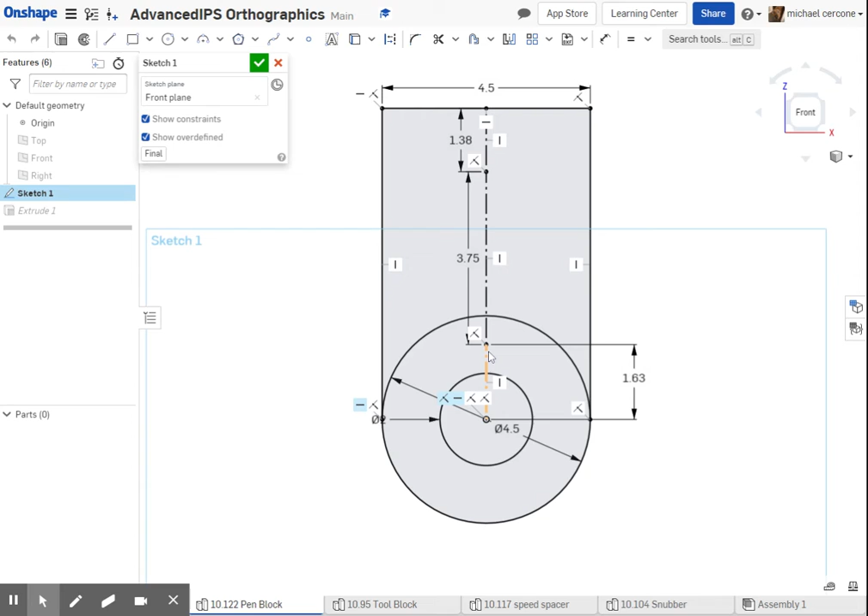My constraints listed, so I started at the origin. I drew these two holes that are concentric with one another. I had to figure out how far up to the top. So going to that drawing, you're provided with, from the center up to the center of your countersinks is going to be 1.625, and then it's 3.75 up to the next hole, and then the next hole is 1.375.

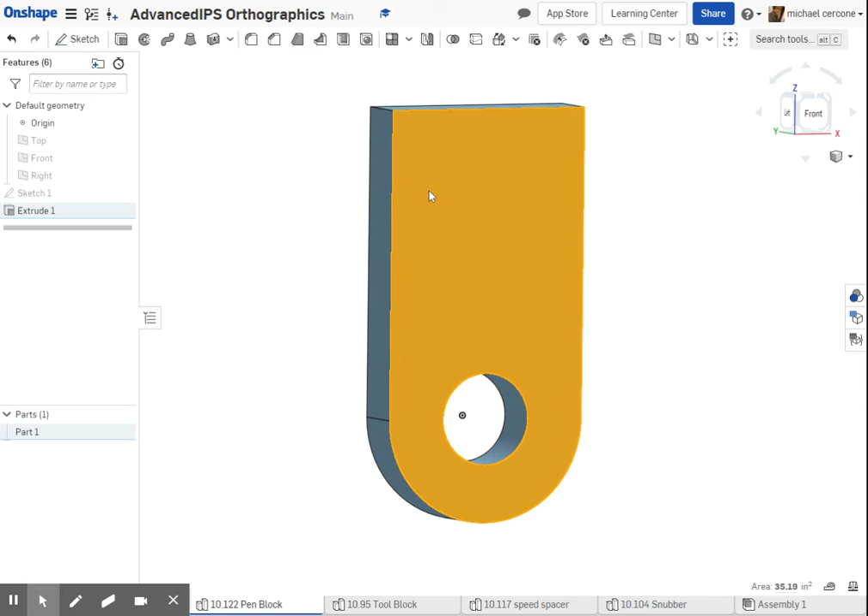So I just drew a bunch of center lines and dimensioned them. Then I took this and I extruded it at the thickness of 1.25. I'm going to add my counterbores next. Counterbores sit right across the top here. You need a sketch with them in place to put in the counterbores. I'm only going to design one, and then I'm going to mirror it to the other side.

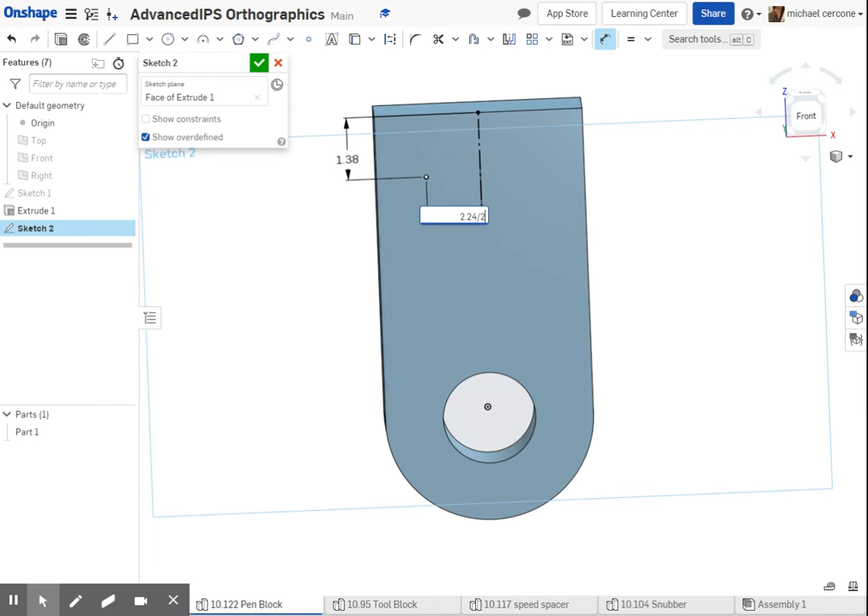So the sketch is on this face here, and all I need to find it is a point. So I'm placing my point and then dimensioning the point. So the counterbore is located down 1.375. And then located from left to right, it looks like it is centered, and they are located 2.24 away from each other. So I'll just draw a center line and dimension this at half of 2.24. So 2.24 divided by 2. Figure out where that point is.

I'll exit my sketch. The hole tool is located right up over here. When you select the hole tool, you're going to be given the option of a simple hole, just a standard drill through, counterbore, or countersink. I know that this one's a counterbore. I saw that symbol that told me it was a counterbore. You could put in custom, or you could choose ANSI and then find the exact one. I am not going to put this on ANSI. I'll leave it on custom.

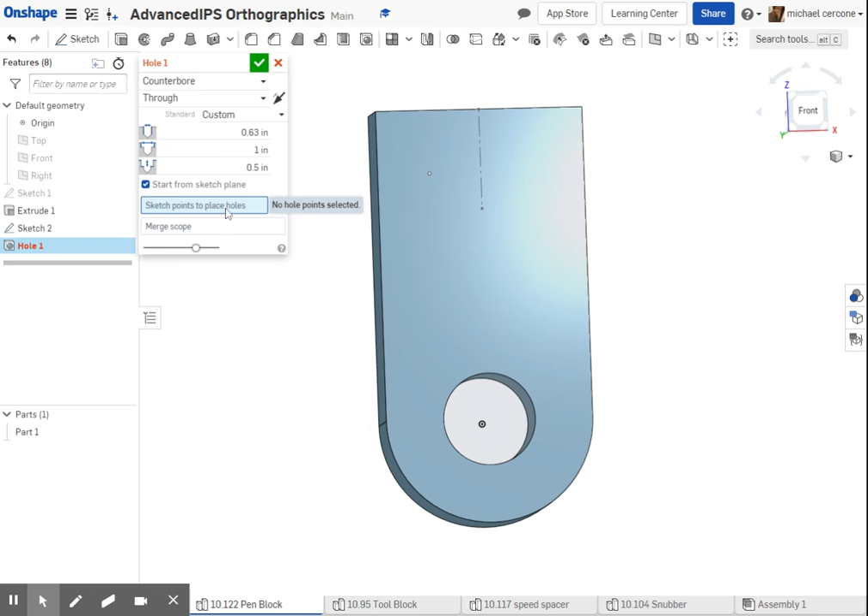So right here is the drill through. So I'm going to type in the size of the drill through. This is the smaller diameter, so the 0.625. Then I have my larger diameter at 1. And then I have the depth of the cut at 0.5. Sketch points to place holes. So I'm going to click here and click on this point. And there's my counterbore. I also have a countersink that's located on the bottom. I'm going to draw that one next.

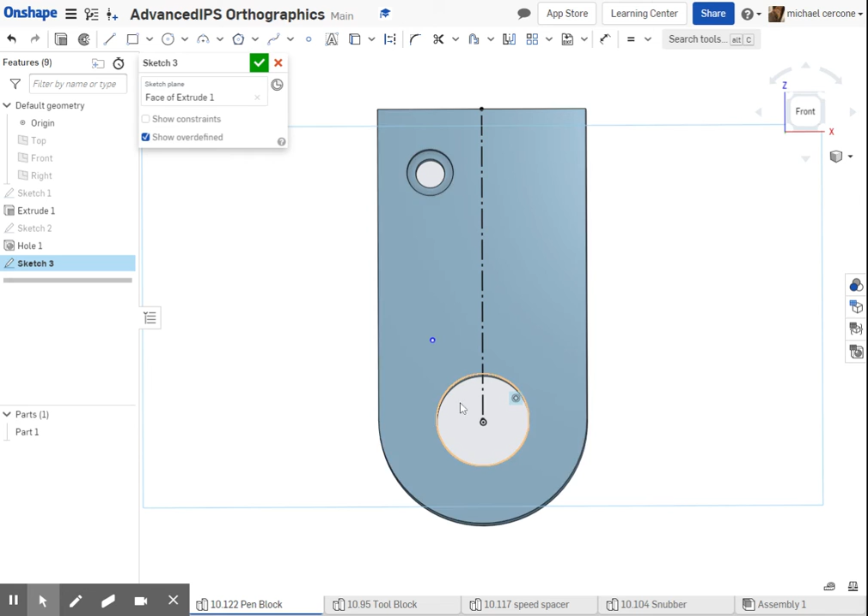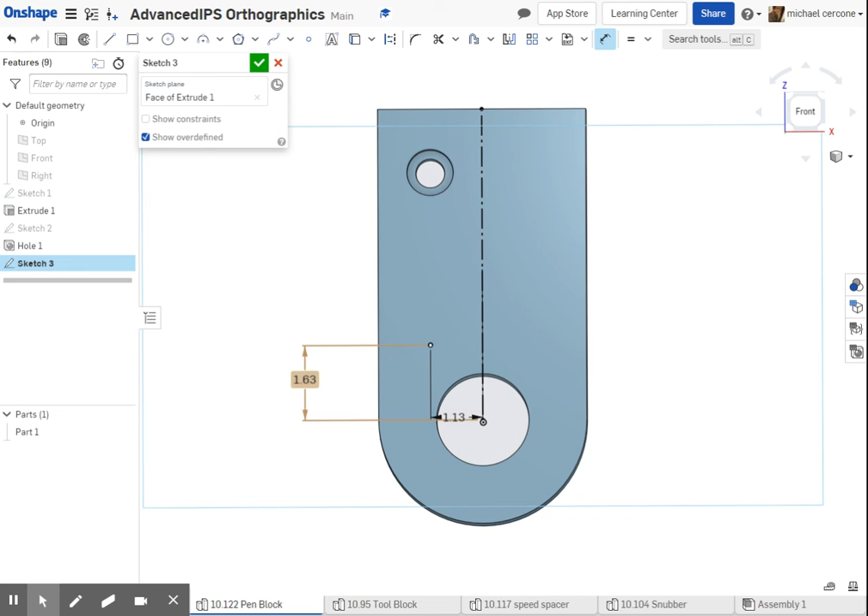So I make my sketch, and I need to put a point in just like I did before. I might as well draw a center line again, just for dimensioning from left to right. And this one is located at 1.13 from the center, so 1.125. And then the height is provided at 1.625 from the center of this hole up. My sketch is done. I can now use the hole tool.

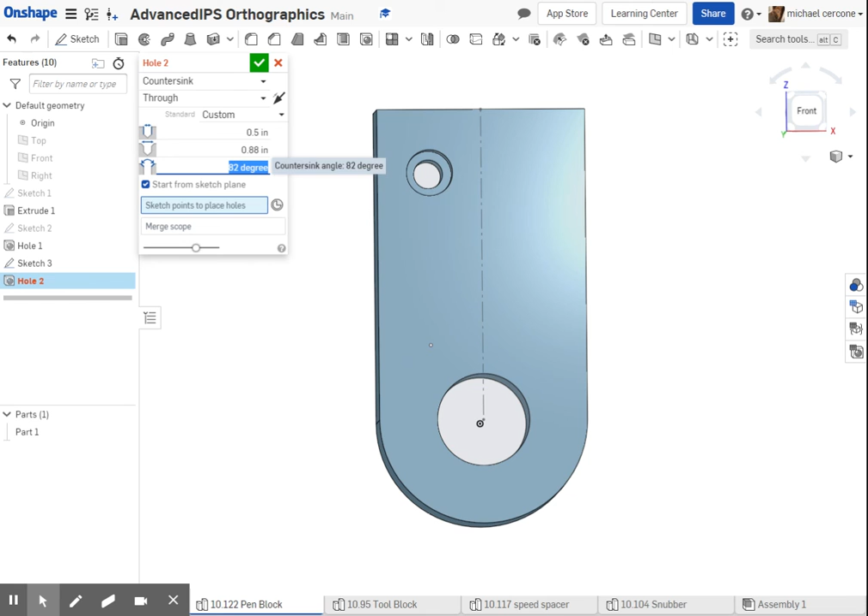I'm switching to a countersink. I'm going to leave it on custom. So the large diameter hole. For this one, I'm finding the countersink symbol. It looks like it is 0.87. The large diameter, I got that wrong, I'm sorry. This one is 0.5 for the drill. This one's 0.875. And this is set at 82 degrees. I don't need that depth of 0.3. This will be calculated by the 82 degrees. Select my point.

There's my countersink. So again, that counterbore is a large diameter, small diameter. This one is a large diameter tapering down. So now I want to get this to the opposite side. I am going to mirror this. And in the next class, I will finish this drawing out in another video.

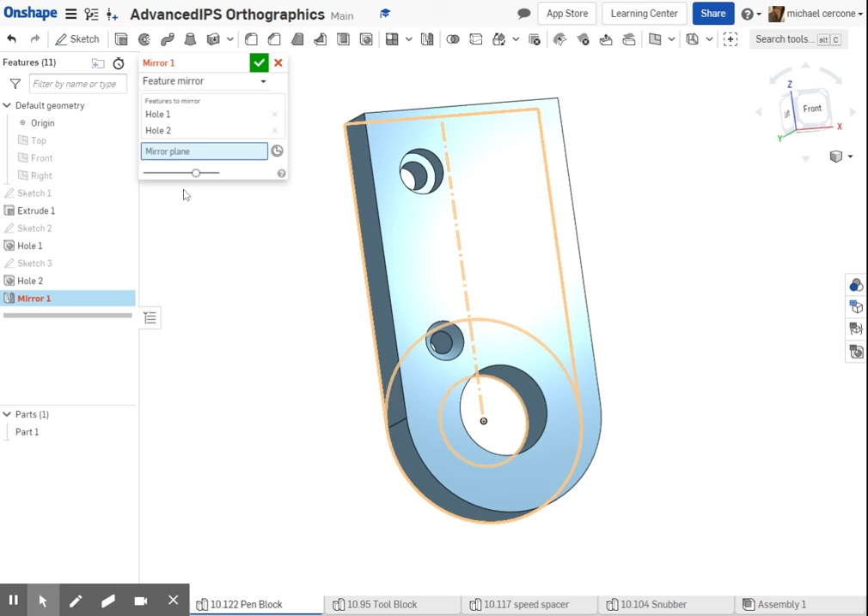So I'm going to choose mirror. It is a feature, as these are features here. My features to mirror, hole 2, hole 1. My mirror plane needs to be in the center here. So I need to figure out which one this is. Looks like the front is not the one. So my right plane. And we'll take these and mirror them to the opposite side. Again, at this point, I'll stop with this video, and I will finish at this point next class.